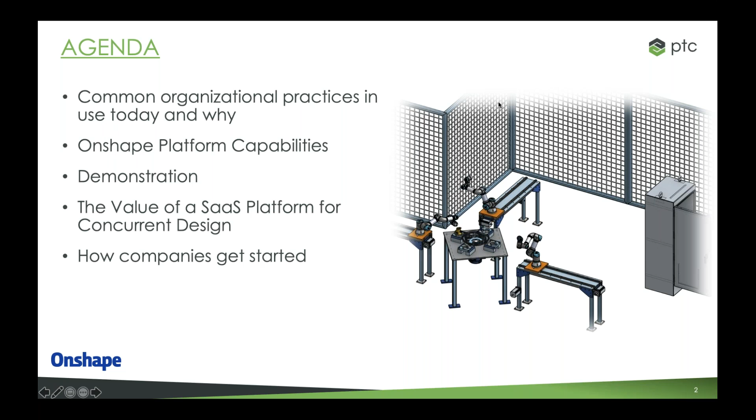So let's review the agenda really quickly here. We'll talk about common organizational practices in use today: your Windows folder system, your Dropbox, whatever you're using, a PDM. Then we'll talk about how you would do things a little bit differently in Onshape using the software as a service platform capabilities through a demonstration. And then come back to some of the tenets of Onshape again.

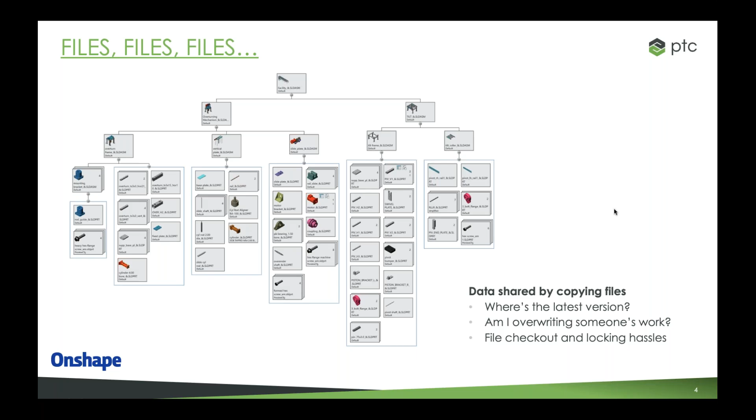Let's think a little bit more about taking those blueprints, those D-size pieces of paper with various parts being drawn on them, and equate them with files, right? Here's a pretty traditional file structure that you might find in a CAD system, with a top level assembly of a machine, some subassembly files, some part files that make this up. Of course, there's drawing files as well that then report up. So this is very similar to each part in each assembly having their own blueprint, right? Think about it - it's true. It's essentially, we just duplicated the drafting room in the modern file-based world.

We think of working in this modern approach. We have awesome 3D CAD systems. We have awesome computers instead of drafting machines on our drafting tables. And instead of file cabinets, we have file servers. And if we're lucky, we might have a database that's kind of taking care of things, like the document control person, knowing that Ed the engineer took out this file at this point in time, made these changes, and put it back in the database - if you have a PDM or PLM system doing that. But of course, when you're working in this approach, no two people can be working on the same file at once. Now, in fact, back in the drafting board days, you could actually have multiple people working on the same piece of paper at once, right?

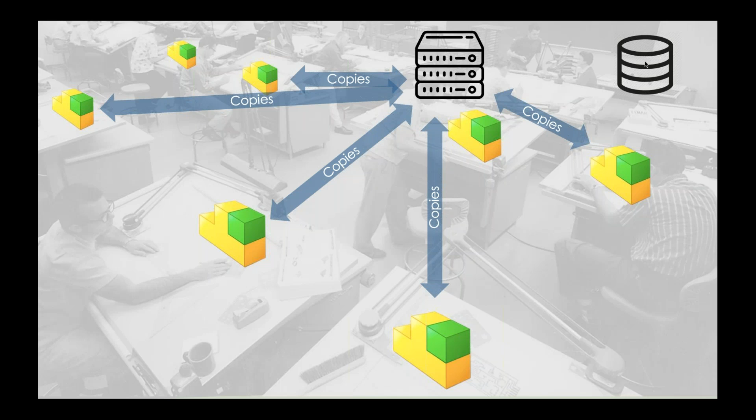If you really think about it, if you had enough room on your drafting board for two people to start drawing on different parts of it, that was quite rare unless it was a big, long wire cable harness drawing or something like that. I've seen that done in the past, but we really haven't progressed, have we? It's kind of weird to think about, but it's true.

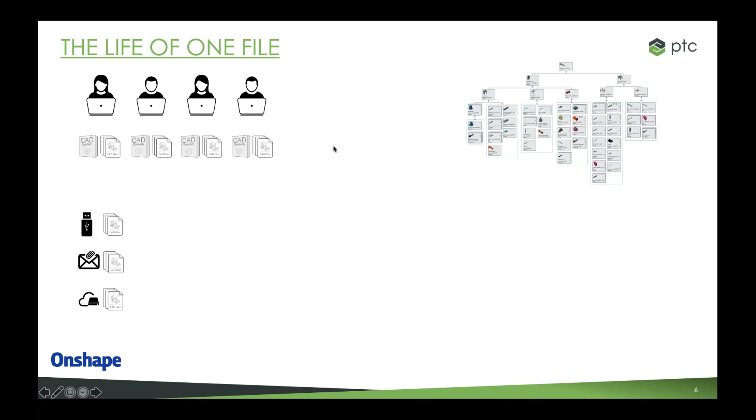So just think about that life of one file for a minute, and then we'll get into how you would organize yourself in Onshape, because in Onshape we wouldn't really think this way, we don't have to anymore. If you think about the life of one file between a team of 4 engineers that would interact with that one file from this tree of files, everybody has a copy of their own CAD system, a copy of a CAD file, and they transfer it in different ways via various file copying mechanisms, whether it be email, cloud drives, thumb drives, hopefully not, and file servers most commonly.

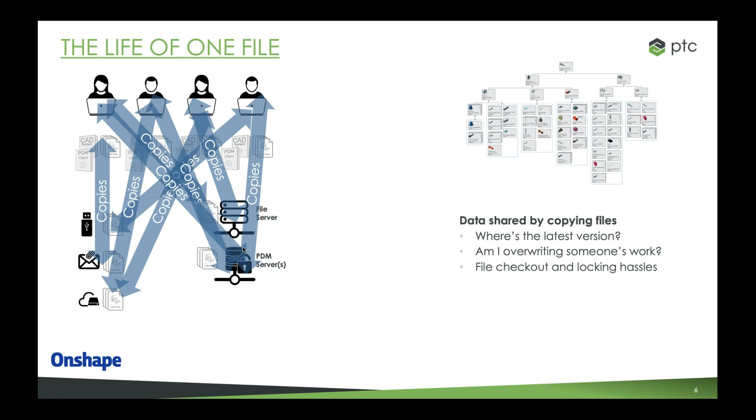60% of all the people that I talk to here at Onshape don't have any PDM system at all. They're just using normal file servers on their network. If they're a younger company, they might be using a Google Drive that synchronizes the files. If they're a multi-location company with maybe more than 5 or 10 engineers, they've probably invested heavily in a PDM server that manages the copy process and keeps track of where those file copies are going. But of course, that PDM system is very much like that photo we just had on the screen before.

And these tools are not anything new, right? Even the things being put out there as quote unquote cloud-based systems, they're still kind of file centric. Only one person at a time can work. There's actually installed software here, there, and everywhere. So these tools actually constrain what you can do for concurrent engineering, working together, which may or may not be a problem to you right now.

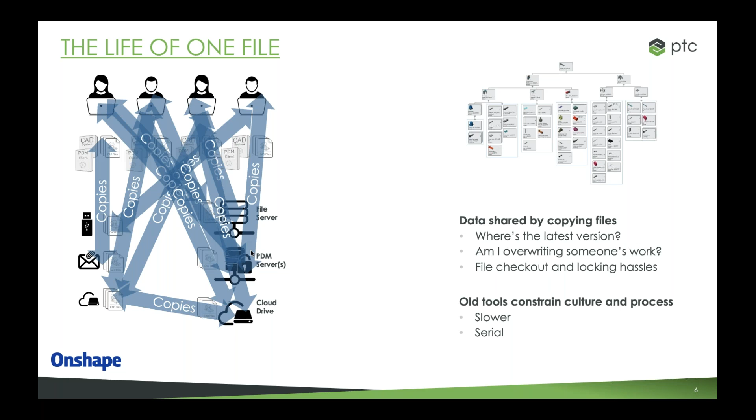But people that are taking advantage of concurrent collaboration systems like Onshape are actually able to get ahead of issues sooner. If we have this file copy based approach and you send a design change, or you're working on a design change after you've sent out files to somebody else to start cutting metal and stuff, everybody has seen this kind of email. This is not something that would happen in a live simultaneous PLM CAD system. But of course, it would happen every single day in a PDM system or a local Windows file server, etc.

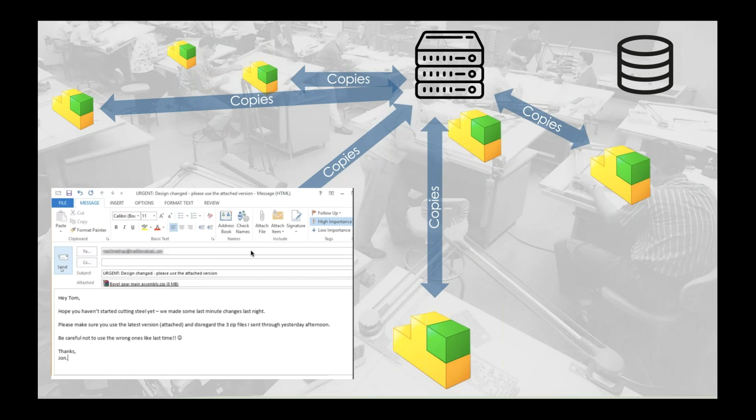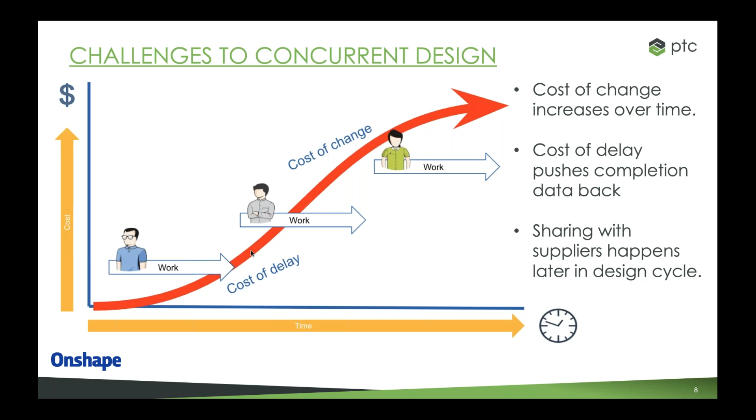As we discussed in the previous chapter of this series, a few weeks ago now, we talked about concurrent design processes. The older systems that are based on files, which only allow one person at a time to work, will end up costing you higher amounts of money and time the longer it takes to find a design problem. So if you can find that problem earlier by interacting and working together, you're going to be able to reduce that cost of change and cost of delay, which is a metric, a KPI, that many first-class companies are measuring nowadays.

People have been trying to build a real-time PLM CAD system, but I think they've been missing the mark if they think they can actually put the files in a database in the cloud and keep the CAD system local. Even the most modern systems that we compete with every day are just moving the file-based problem to a cloud container. It's not really a real-time collaborative environment like Onshape is.

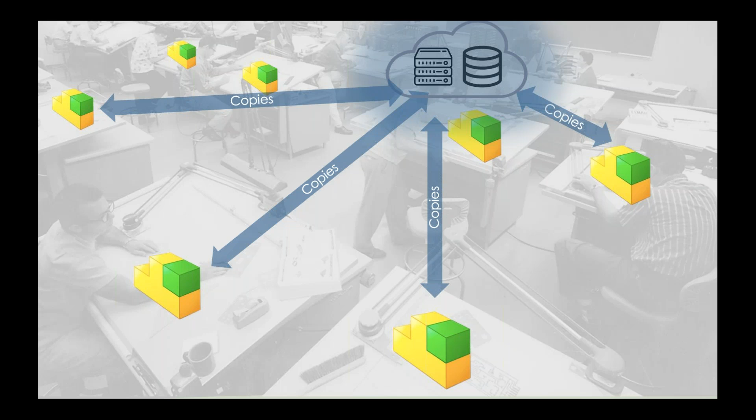So people that want live real-time analytics and information aren't going to get it from that previous slide we just looked at. If we really think about it, how can Mike, the manager up in the front of that drafting room, know what Ed, the engineer, is doing? Because quite often they're not in the same room anymore. There might be a customer site, or they might be at an office across the country. Of course, they can get on a Skype call and talk to each other, but it's not up to the minute information like most other business systems provide today, like Salesforce.com or Jira for software management and development. Things like that are real time.

You get dashboards, analytics, information about what's going on in the business of your company. All the other departments in your company have these tools, except for the most important department, the engineering department, that is the lifeblood and engine driving the company. It's kind of crazy that these tools haven't been invented yet. Until now, of course, we have Onshape, so you can get that real time information and work together collaboratively in real time.

So Onshape does more than just CAD, right? It is data management. It provides a new paradigm for design, practice, and workflow, which is really what I'm going to get into today. I'm not going to talk about how to draw lines and arcs, but I will be talking about how to organize parts and assemblies in a way that is conducive to collaboration and real-time problem solving.

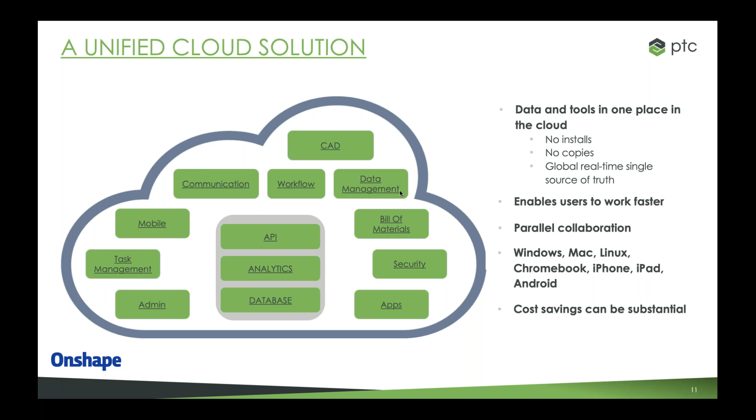So let's hop into it a little bit. We'll build some piece of machinery, at least a piece of it. This is kind of the end result of this particular design, a machine design with some robots moving along these rails here that are going to pick up these little parts.

Part interchange is important in this demonstration. We need small, medium, and large widths of these little carousel carriers that we'll be working with for different parts that are picked and placed. And we need to design it for different markets. Maybe you'll have different types of motors in the EU versus North America, so the power cabinet's going to change. There will be different parts in it, different types of wire, connections, things like that.

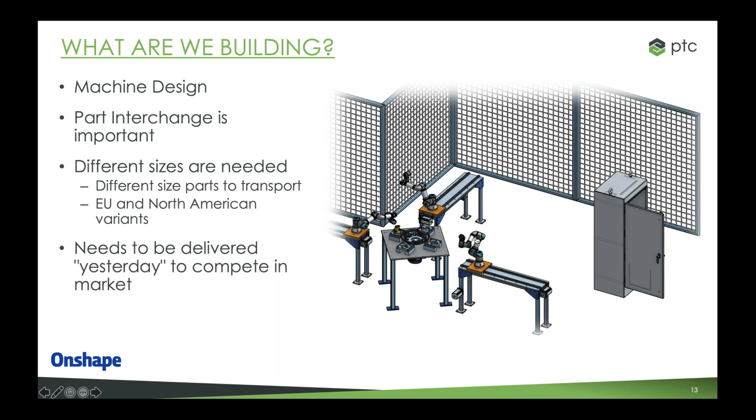And of course, when you're designing this type of machinery, it's always a very fast lead time, because you have the product manufacturer who's going to need a machine to automate the assembly process. So these types of projects need to be done very quickly. We'll work between several different engineers during this demonstration: Mike the manager, Debbie the designer, Ed the engineer, and Emily the electrical engineer.

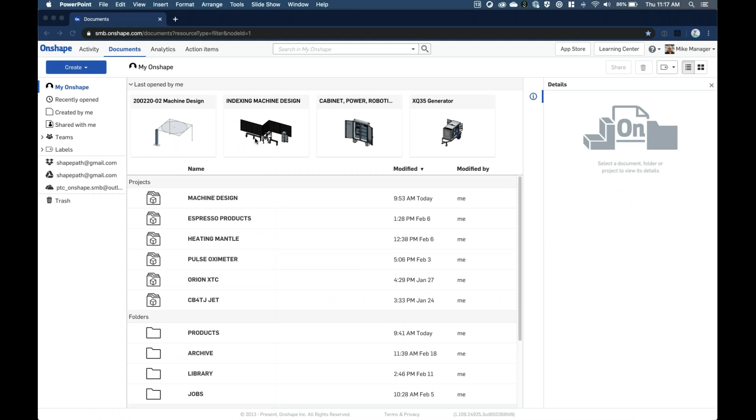So let's hop out of the slideshow for a minute and go into CAD PLM land here inside of Onshape. I can jump into the actual machine design itself. Of course, we're in a web browser, just Chrome here on my MacBook, and you can see I'm opening up multiple tabs.

I have the main documents panel tab. I have an activity tab to show what's going on, kind of a lens of information into what's happening at my company. I can see right here Mike the manager just opened up the indexing machine design document, and I can see a list of his activities in real time, so I can understand what's actually going on. Pretty cool to see.

Then we have the documents page, and then the top level machine design, which I just pulled up right here. As I move this around, we can see the actual machine working.

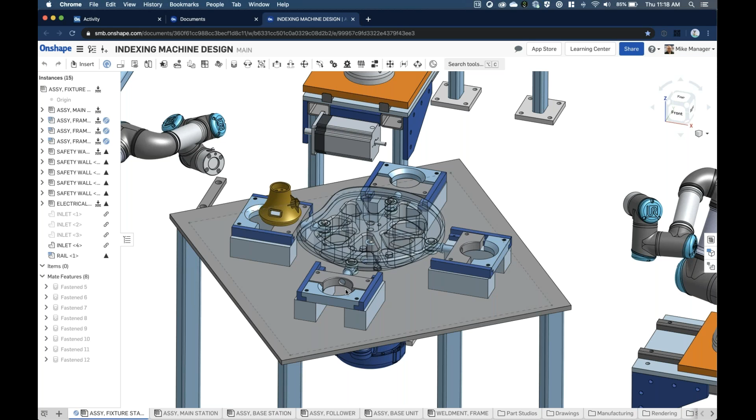I have this cam mechanism that's moving these plates back and forth, like here. And once a part moves over, this robot might come over, pick it up, grab it, and put it in a bin somewhere else right here.

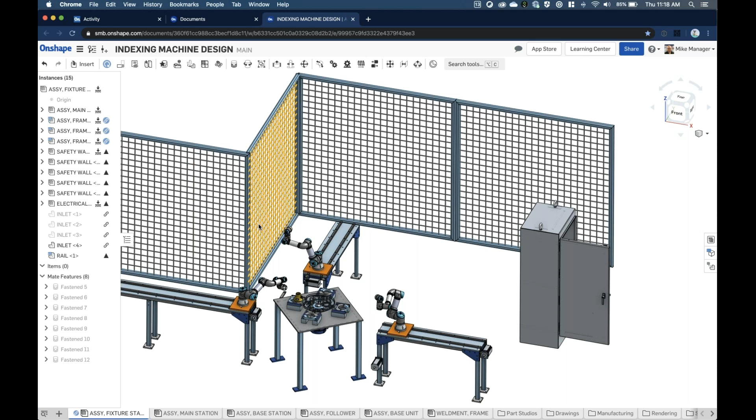So how would I go in and design in Onshape, knowing that we don't have to worry about file management per se? What I'll do is start a document for this machine design. I have a little bit of it started for ease of demonstrating what we're going to do. This is an Onshape document called this 200220-02 machine design.

If I look at it, there are several tabs in it: a top level assembly, a frame assembly, and several part studios for different types of operations. You might do this in several different documents that all report up to one another, of course, but for these three basic pieces, these are the unique pieces for this particular machine that I'm going to keep together in one document.

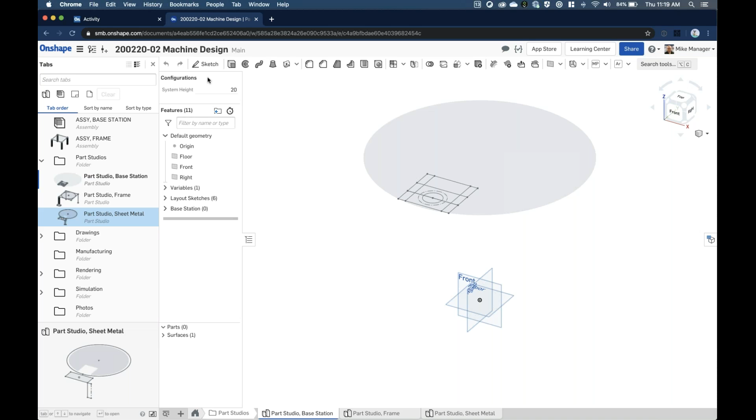Of course, you would not do this kind of thing in a file-based system, and the reason is because only one person at a time can work in one file. So on this base station part studio I'm working in, if you wanted two people working on this, one person might be working on this piece of rail right here, and another person might be working on this end fixed piece right here. But in Onshape, we don't have to do that.

Because the file is not the atomic unit in Onshape, it's the database that's keeping track of things for us. I'm creating two parts right here, and you see this part list being generated. It keeps track of all the different parts being made inside of the system.

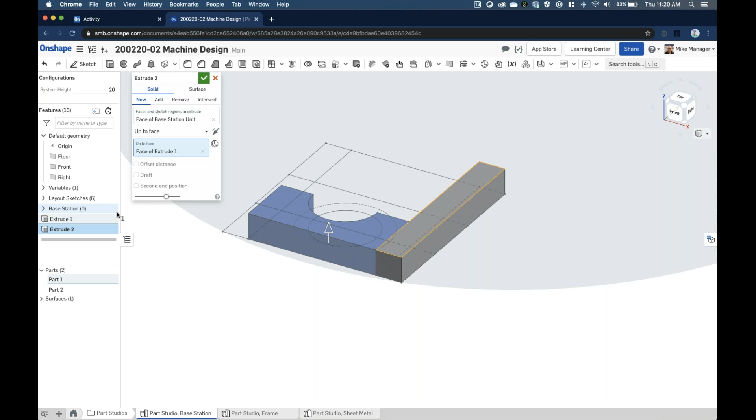So that's two different parts. As me, Mike, the manager, who has signed in right now, I might start this design and then interact with some of my other colleagues to help work on this.

If I add a comment to this surface, inviting my colleague Debbie to help me with this, how to attach this to the frame, I'm going to ask her a question on how to do that. I can ask her that question, I can assign her a task. That'll be a future discussion we have in the system to manage all the tasks and processes in my company. But I'll assign that to her now.

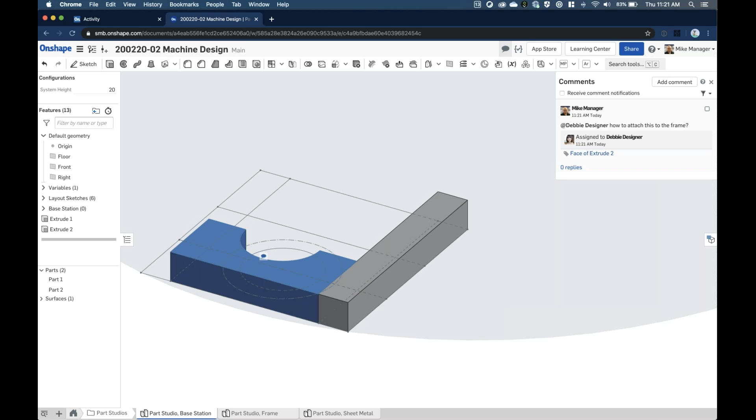She's invited to work in this design in a view-only fashion by default, unless she already has some other kind of access built in already. Let me go in and open another window as a second user right here. I'll sign in as Debbie, the designer. So I'm changing hats, if you will.

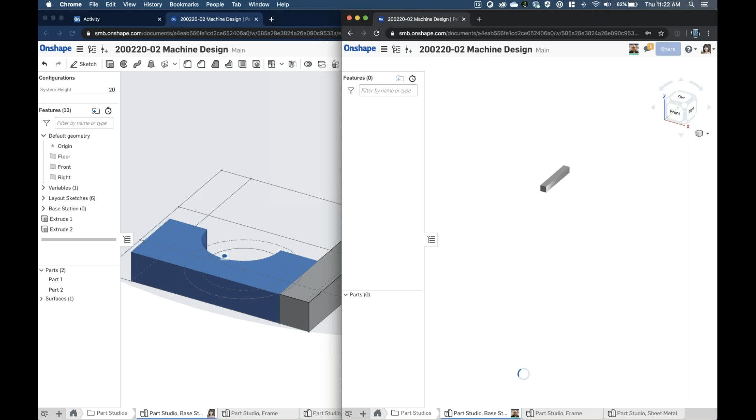As you can see, she has been shared into this particular design. If I look at the share settings, it's actually in a project. Let me just share her in like this, give her view and comment access. If she goes to her document list, she will have access to the machine design project and be able to jump into that design with me. Now we're both looking at the same information simultaneously, and we can work together in one document instead of having to split these out as multiple files.

Now let's think about this again for a second. Why is this even important? Why is it cool to have multiple people in one document designing these parts together?

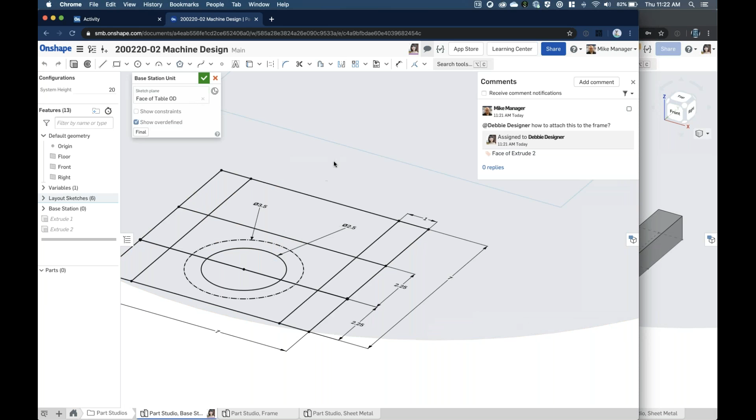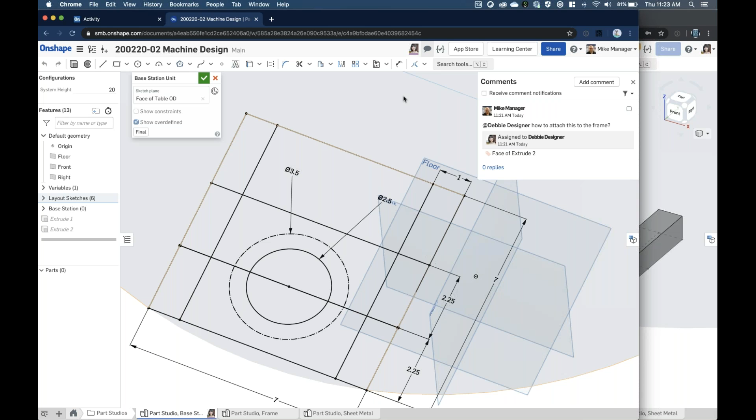Well, look at this, we have a layout sketch. This layout sketch is very nice because it's like an engineering notebook or even a napkin sketch that describes parametrically how this system should come together. I did not have to do any kind of fancy assembly-in-context modeling, didn't have to do any weird skeleton type modeling. In fact, all I did was sketch out what I wanted for the shape of this design, and that makes it easy to go in and start establishing different parts inside of here.

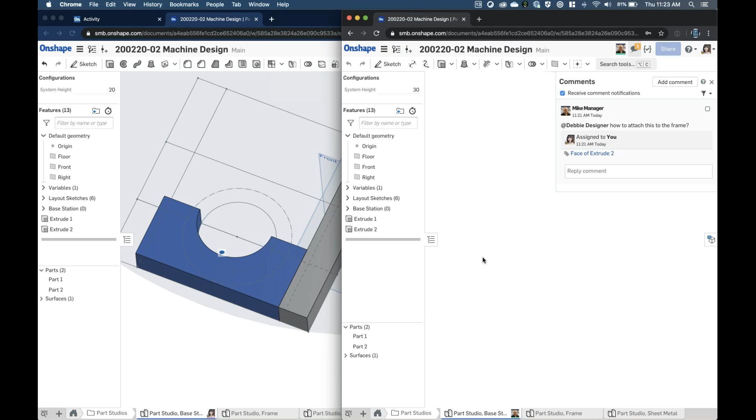And because of Onshape's database-driven nature, not being file-based and locking up files, I can then go in and propose edits, modifications, and reply to comments that have come in. Debbie might say that a socket head cap screw may be appropriate, right? So that conversation is happening live inside the document.

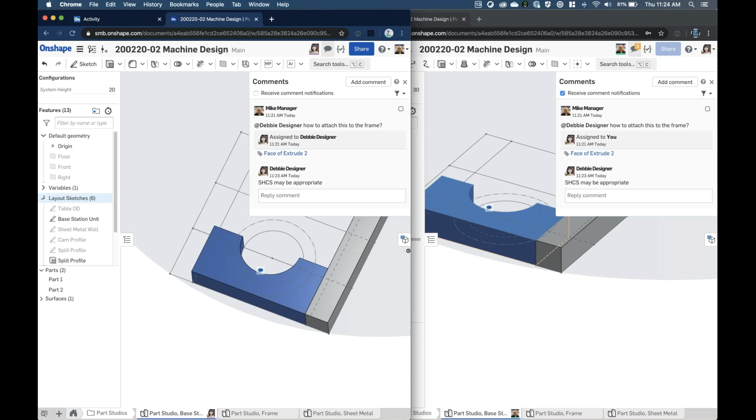But more importantly, as Mike starts making changes to the design, we'll split our windows up here so we can see what's going on a little easier. I'll turn off these planes and turn off this layout sketch so we can see even more clearly. You can see, of course, that's updating on Debbie's side of the screen.

I can go in, create a sketch, and offset some of these geometries that we're looking at right here.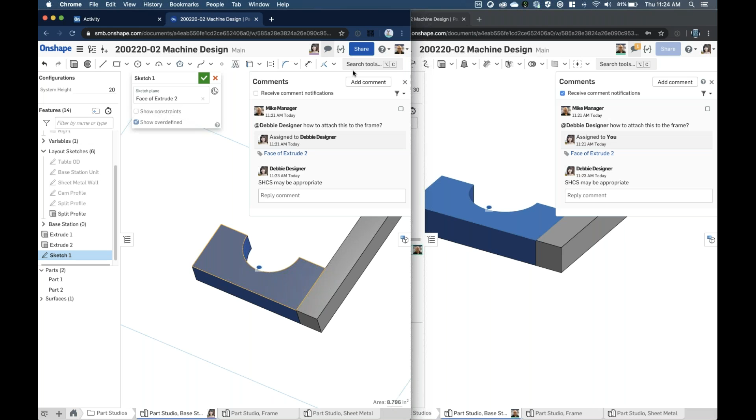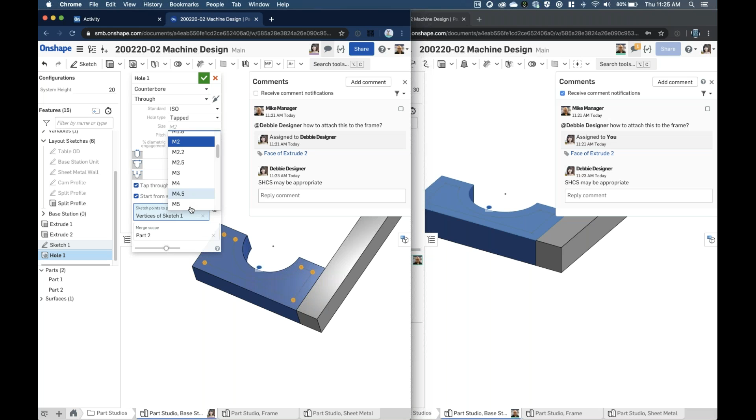Let's go in and add that feature to attach a socketed cap screw. Of course we need a hole to place that, so I'll throw in an offset on this particular surface, in locations where it might make sense to have a socketed head cap screw in place somewhere. Maybe we'll do 3/8 of an inch. And I'll place that hole inside of the design using the points on the corners of that sketch. We'll call it out as an M5 socketed cap screw hole for counterbore.

And now we have that, and of course Debbie is seeing that update straight away in her design. And of course she has access to this design, she's a member of the project inside of here.

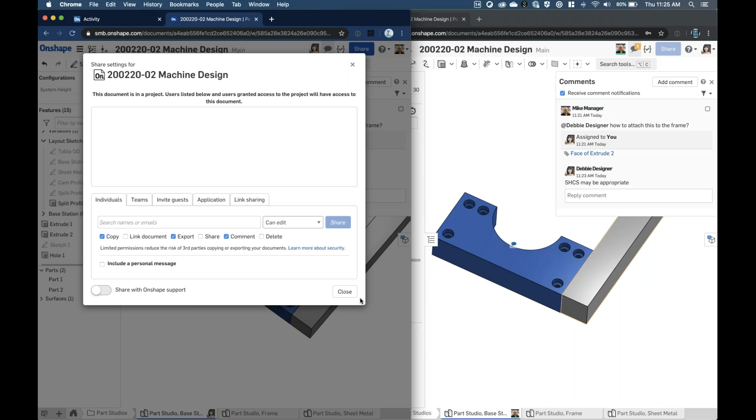Now, she's actually a member of the engineering team, so she doesn't have to have any special access. I could actually remove access like this because she's a member of a project. She already has the edit permission being an engineer in my company in this particular project folder. So I could even remove that, and she still has the ability to edit this design right here.

She might know that this hole right here doesn't need to have holes on this corner and this corner. Mike can even see that Debbie is making that design change live and in real time. As soon as Mike or Debbie hits the OK button, we're seeing that update live again.

So the other part of organization in an Onshape cloud-based approach, and I'll just accept that right here, is that the names of the parts can just be set on demand.

You don't have to go file, save as, C:\ this or that. You're just going to say this is the rail just by naming it as such, and this is the fixed plate. That's the two parts I have here at my fingertips. And if anybody else in the company wants to find a part called rail in the system, they can search the database to find it. It's going to find it because it's a real life database driven object.

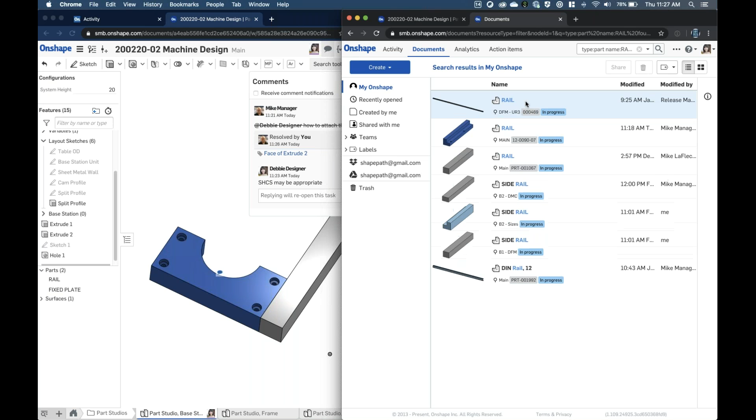You can see right here at 11 a.m. is when I originally made one of these rails. There's more rails popping up here as we go through, and this rail will pop up in just another minute. So it's really pretty cool that you don't have to know where that part is. It lives in this document, but I could use that rail somewhere else if I really wanted to, which is great.

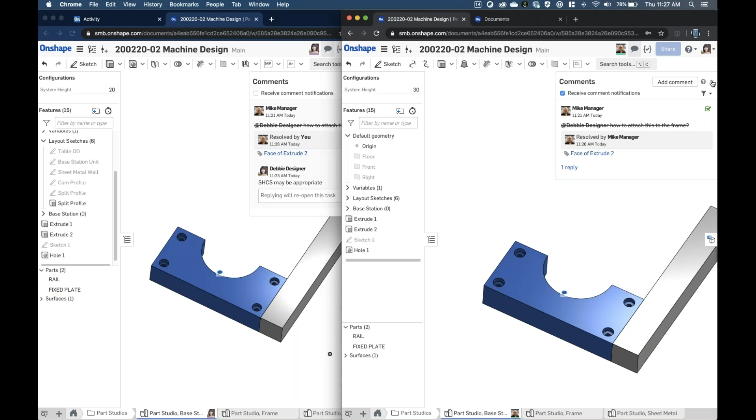Now, I renamed these parts with other people looking at this at the same time. Everybody knows this would be a complete disaster in a file-based system. Renaming parts while other people might have other copies opened up causes all sorts of problems, which would never happen in our system. So we're able to create these parts together inside of the design without thinking of file management. That's the big thing I want you to take away from this so far.

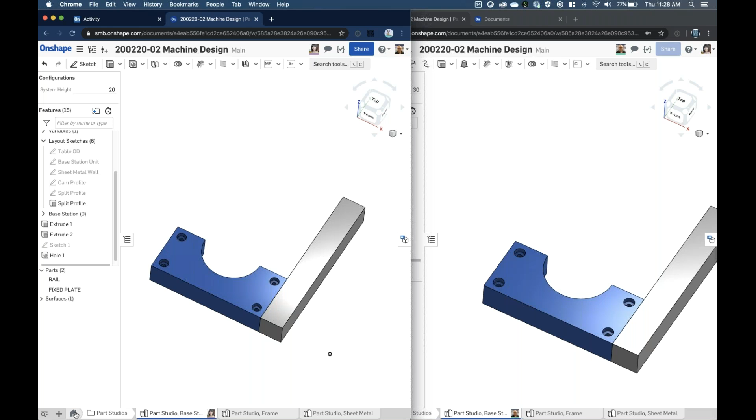Other ways of organizing your information are to bring these into assemblies and start referencing things from your libraries of information that you build up over time. So if we go to an assembly I happen to have, right here for the base station, a blank assembly, and I insert the two parts I've created so far into this assembly, I have those two items.

I have another item on the other side, and I need two rails essentially to keep this together. So I'll just make a copy and paste of that particular rail. This part is fixed in space, of course, the fixed plate. I might group this and this together because that's how I modeled them. That's one way of mating parts inside of Onshape.

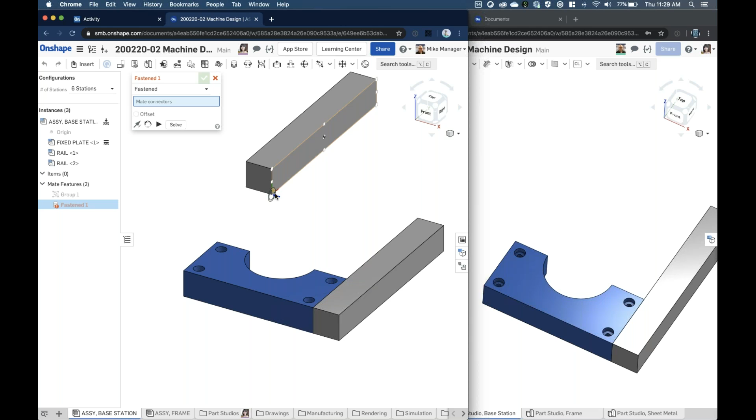Another way of mating parts inside of Onshape is to fasten the components together at appropriate datum points. So I'm going to take this corner and match it to this corner right here. There we are. And of course, maybe I need another plate on the back that's not fixed.

I will continue to do that as Debbie, going back to that layout sketch, taking this piece out, hitting the extrude command again, going up to this face, and then naming it appropriately, of course, the moving plate. And I would insert the moving plate right there. It pops into place automatically, but of course it's not really mated in place.

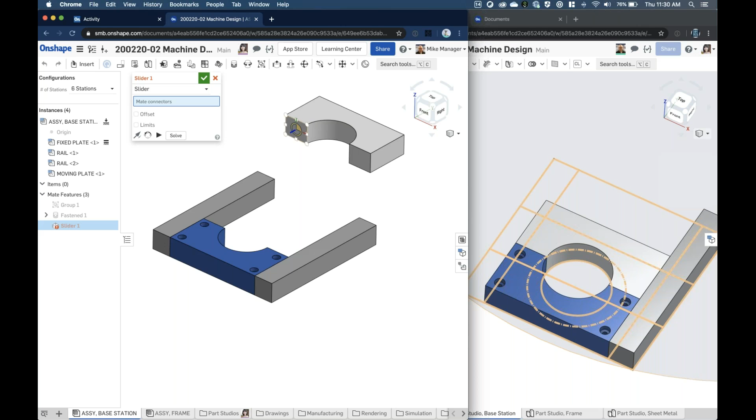I would need to add some sort of mate to it, so I'll just add something called a slider mate, taking this surface here and putting it on that surface in the center as well, matching it up. And now we have the ability for this to slide back and forth, and it adds one mate. So you can see organizing your assembly is also much quicker and more effective and less work.

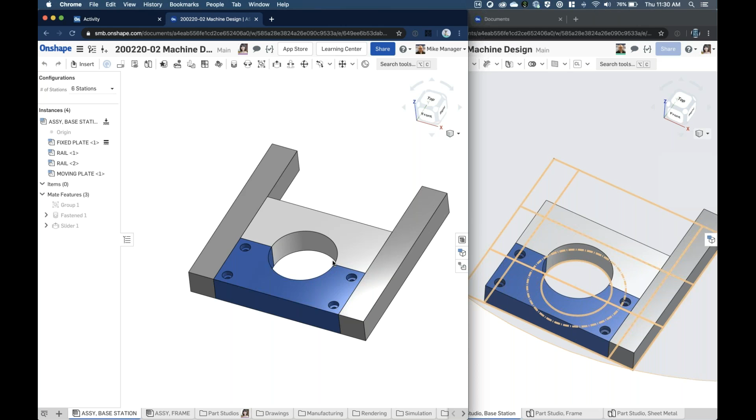I can even set the limits of this slider mate to go between a certain range of motion here. So I can just set that so it only moves between 0 and 6. Looks like 6 is a little bit short for that range of motion, so maybe we need to make the rail bigger. So Debbie is going to make the rail bigger.

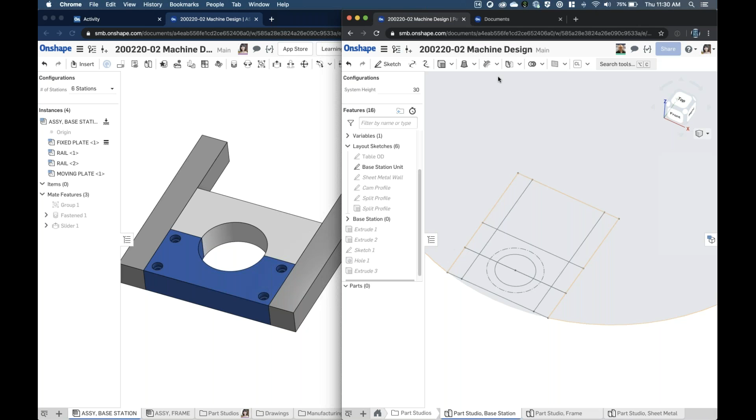Maybe a comment is thrown in by Mike asking her to make the rail bigger. So she can go into this design to make this go from 7 to 9. As soon as she hits the OK button, we're going to see that update in the assembly, of course. And now we have a part that's not going to fall out of this channel that I've developed right here. So that's another way of seeing how quickly you can interact with one another.

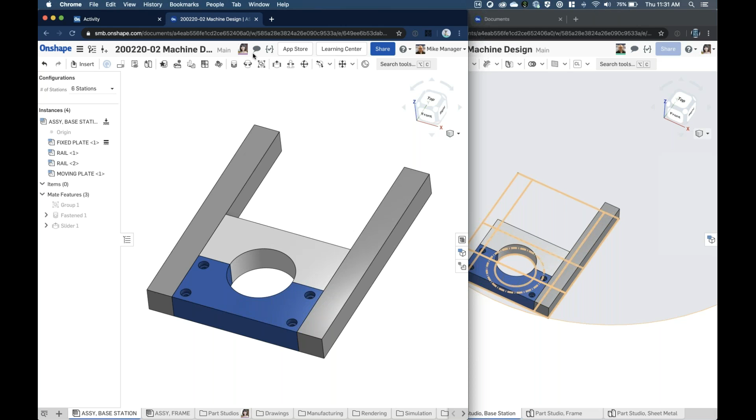You didn't see any file save as, check-in kind of operation. Everything in Onshape is recorded as an item in the history. Think of this as like a bank statement where you see all the transactions on your card. In Onshape, you actually have a listing of every single transaction that's ever occurred in the design.

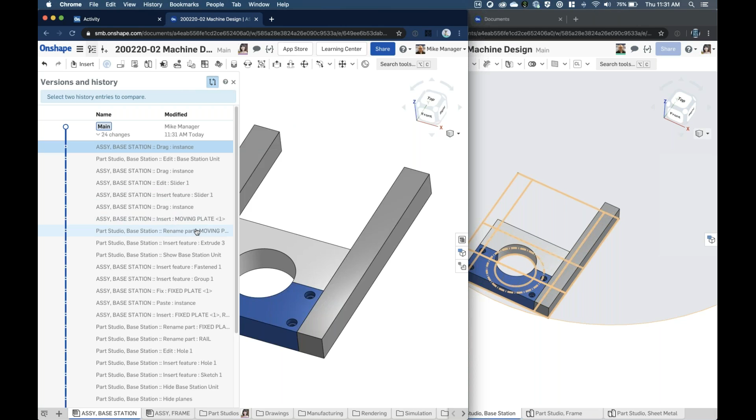We're not creating file copies on a server somewhere. It's the database that knows how to reconstitute the model at any point in time. I can even compare one moment against another to see what the differences are between an older moment in time and a newer moment in time.

If I go to the part studio right here, we'll see the change occur, showing the new length added to that particular piece of rail right there. And of course, in this timeline view, we could label versions in time as well.

So I'm going to check the questions panel right here. Quick question about using a motion controller like a 3D mouse or something. Yes, you can do that. 3D Connexion motion controllers have Onshape drivers available. You just need to update your driver to the latest version and it should work.

Next thing I'll do is just create a labeled version in time. Right here, I'll set this at version 1, so that way I can keep track of major developments along the timeline. So that's version 1 in our timeline.

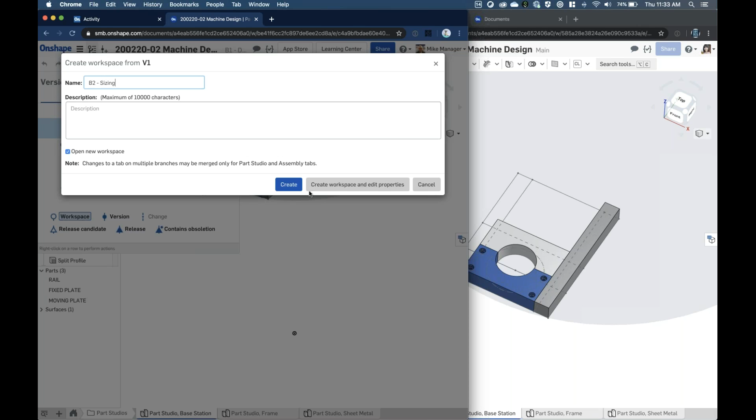We can even try out different design alternatives now with this unique timeline-driven approach. Instead of doing a save-as copy, making more and more files, Onshape allows you to branch to create different design permutations and ideas. So this one might be design for manufacturability, and another might be a branch for the sizing of this. Remember, we wanted different sizes for different reasons, for different parts that might interface in this design we're looking at.

So let's do that. On the sizing branch, I'm going to go in and create a couple of sizes using our configuration manager on the side of the screen. I'll add an input for maybe device X, device Y. Let me just do it this way, copy and paste. Copy that. Paste that. There we are. Device Y and device Z.

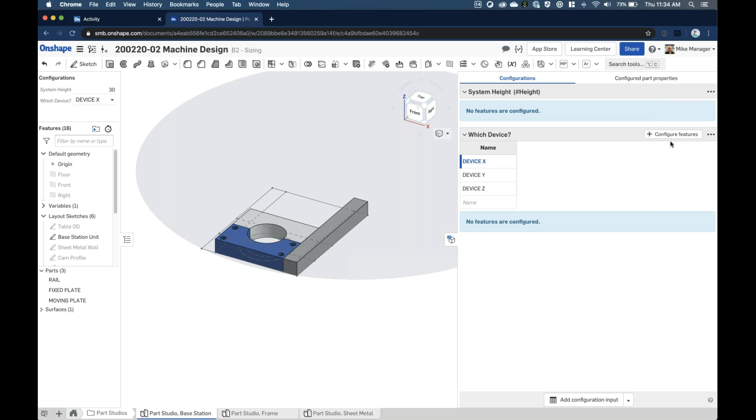So now we have these three devices, which I might ask a question, which device... First day typing, I guess. Here we are. And so now I have this interface, this menu showing me device X, Y, and Z. And then I can configure from one nice sketch the dimensional information I need to alter. Maybe this diameter I need to alter as well. So now I've built up a nice small table.

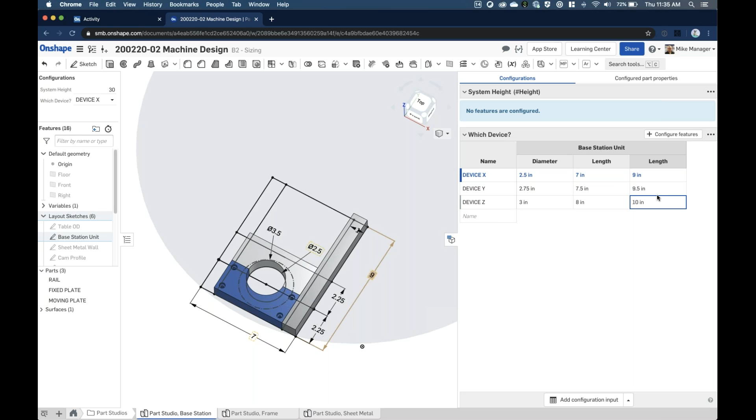We'll go from 2.5 to 2 3/4 to 3. We'll go from 7, 7.5 to 8. And then this length right here might be 9, 9.5, and 10. Now I've built up a nice little table that allows me to alter the shape to accommodate different devices that might go into here.

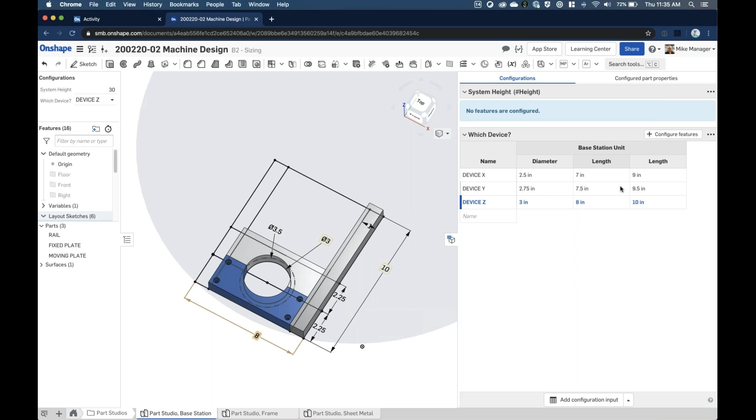So we did that as configured items. Now, organizing your company, I'm looking for these. I have these three parts that I've controlled using these three configurations. Of course, that's available in the assembly as well. But how would I organize myself? That's the focus of this discussion. I have these three plates that need to all be found, released, and produced.

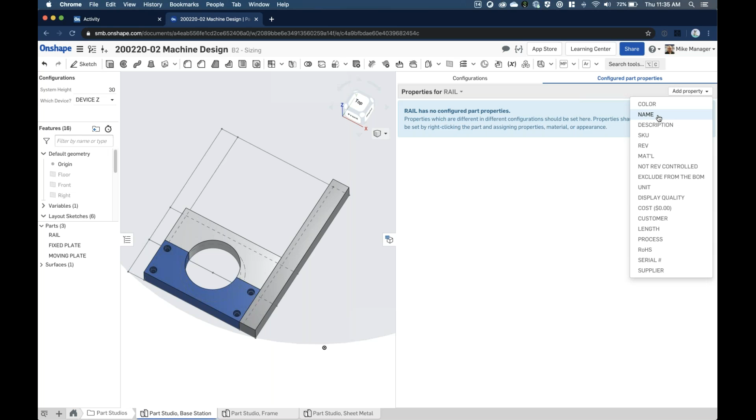So we have configured part properties, and this is where the CAD system kind of becomes a business system. So I have this rail, and I can add a property called name. Maybe I'll put the part number to SKU. I'll also show, let's see if there's anything else I want to show. Maybe not, I guess that's all I'll need.

So for device X, Y, and Z, I'll just go device X, Y. I have this other system height variable, just ignore that, it was something I was playing with. Rail device X, right, I'm giving it a name. So this is actually the name of the part in the database. Device Y and device Z. And of course, look what happens immediately in the parts list.

We're using the rail for device Z. If I go to the assembly over here, it's probably going to be X because that's the one I inserted the first time, and there it is. Of course, we can configure the assembly as well. Here's the bill of materials in the assembly showing the rail for device X right there as well. So everything is all up to date simultaneously. No need to save as, check in, check out, or anything like that.

Of course, you'd have to fix a whole bunch of broken references doing what I'm doing now in other CAD systems. Let me go back to the Part Studio. So, configuring the properties of the parts, I can even give these all different part numbers. I just assign them all from our part number database, which you can configure inside the company settings of the Onshape system. And of course, you would just do this for each one of the parts.

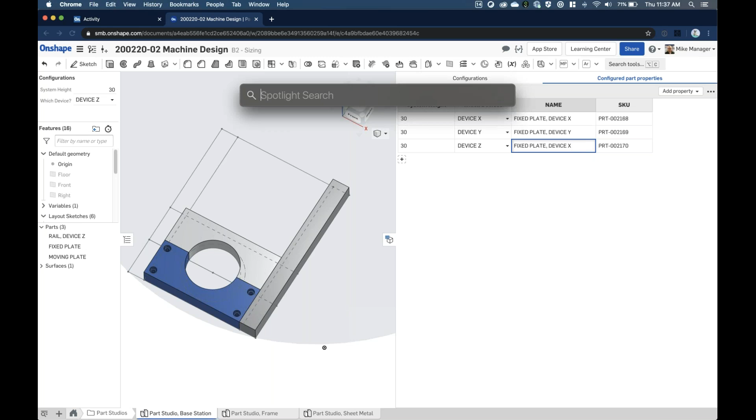All right, I won't keep going with that. It's pretty clear now that you have all these parts, and you can release them. If I go to the assembly, I can match these things up.

So you're organizing your assembly to use each of these different sizes: Device X, Y, and Z. You go to the configuration tool here, hide this one, and add a new input for device X, device Y, and device Z. There we are, and of course it'll have the same name as before, which device.

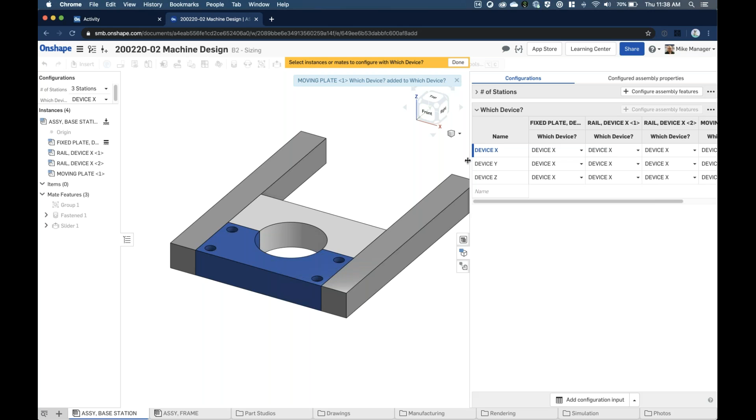To configure that, all I have to do is pick the part out of the list and tell it which one I want it to use. So I'm doing a mapping, just mapping one field to another from the Part Studio to the assembly. Now I have device X, Y, and Z, and I have assembly level configurations.

Just like that, I can work with device X, device Y, and device Z, and the parts are up to date right here. The mates all work too. You could even configure the mate. If I go into the slider mate, I can configure how long that should be able to move.

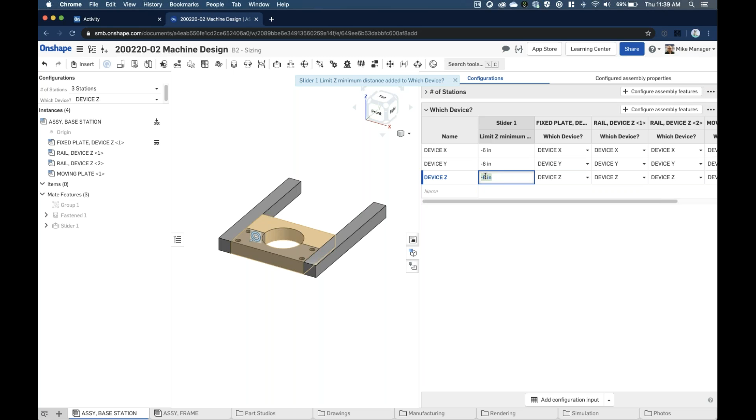So maybe in device Z it's going to be 6.5, and in device X it's going to be 5. So now device Z can move further back than device X, which should only let me move 5 inches. If I measure between here and here, it's 5 inches.

So you can see how fast this is. This is incredibly speedy design because you're not waiting for the baton to be passed from one person to another. Instead of running a relay race, you're running the race all together at the same time. It's just a way faster way of doing work.

Of course, the bill of materials is also configured and up to date with the available information. I can even generate the part number right from here, and even set the name of the configuration right here - this is moving plate for device X.

I actually did that from the BOM, but if I go to Y, you'll see it'll go back to just a regular name, and I'll call that device Y and device Z right from the BOM. So this is a live BOM that we can work with.

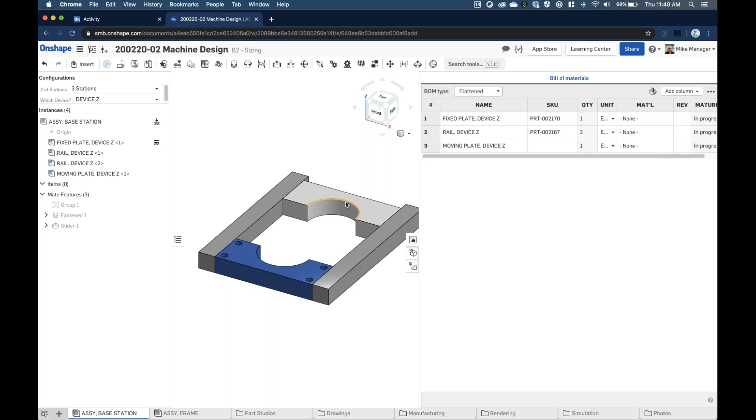Now, at some point in time, you want to stabilize this - this is early on in the development process. We don't want to have a completely free and open thing forever once we start going to quoting and manufacturing. That's when you go in and create a release package to stabilize it.

So I'll take this assembly of the base station, create some sort of drawing of it. I might actually have a drawing ready to go - all I have to do is just load it up and refresh it. There it is, it's already partially done.

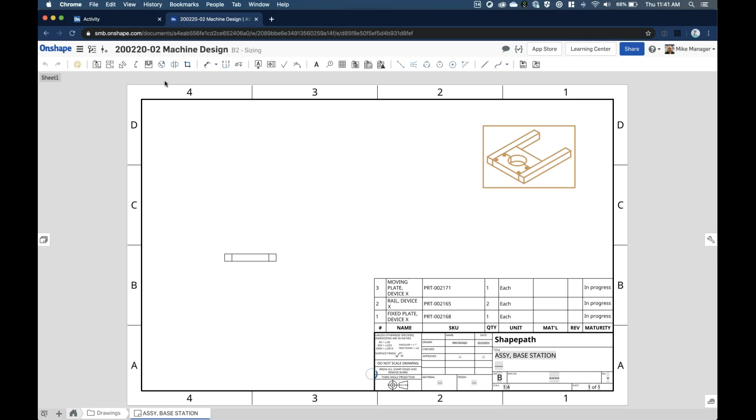There's my bill of materials, and I can show the shaded view, pull out a couple of sections, things like that. I like the way this looks - looking good. There's my BOM, and I want to release it, so I'll create a release package including all of the parts that make things up.

It's telling me I need a different part number - I must have used this from another design. Let me reset these.

All right, so it's showing me right here all the things - all the parts, all the sub-assemblies that make it up. I can assign those part numbers straight away and give it an ECO number, which I usually just match to the drawing number.

Oh, copy that again - undo is your friend. There we are.

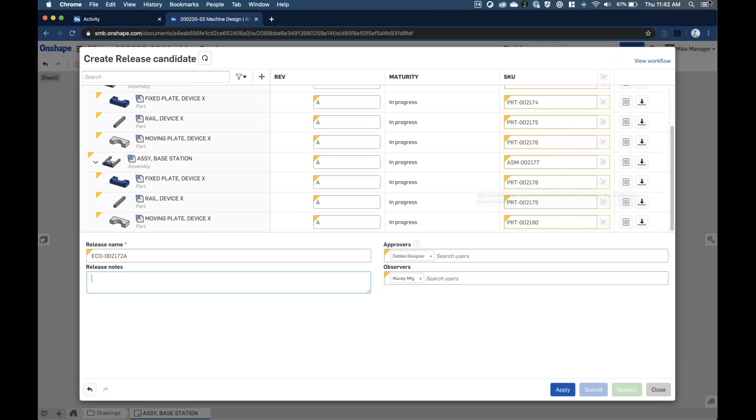And I can approve that - somebody can approve it for me, like Debbie, and somebody can look out in the manufacturing department that this is coming down the line, and I can submit that for approval. So that's the release management process to stabilize that, as a labeled version in time.

I've actually told it not to let me release it if we have a pending update on a drawing as well.

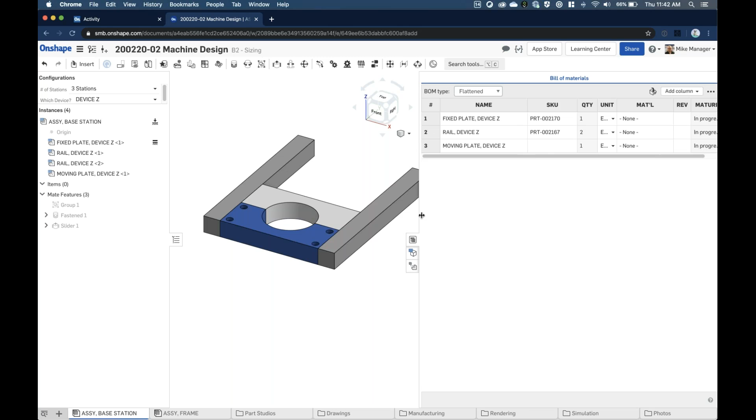That is different, right? Now, if I go back to the assembly, maybe you want to also insert other parts from your libraries—maybe a standard actuator, a standard library of different things. You can insert parts not just from inside the document, but from outside of it as well.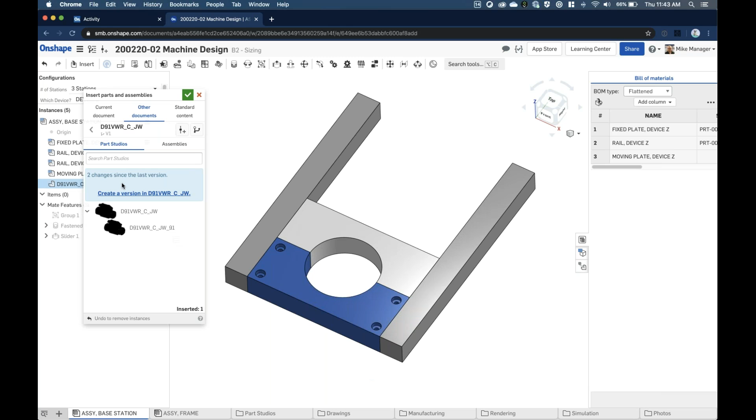If I go to Onshape here, you can browse through any libraries you've generated. Maybe I have an automation folder with motors or hydraulics where I can drop in something I've downloaded from a supplier. I can go in and drop that component into the design by browsing around my system for it. But we're in a cloud-based database, so we don't really need to browse around for parts—I could actually search for parts instead.

If I hit this filter button, I can say I'm looking for an assembly, or a part from a certain supplier. Let's look for SKF bearings. I'll search for anything made by SKF in my system, and it produces results. There's an SKF bearing right here, and it asks me which configuration I want, since there were configurations built into that part. I'm looking for the 626, and I can use that particular configuration inside this design—it's configuring it on the fly.

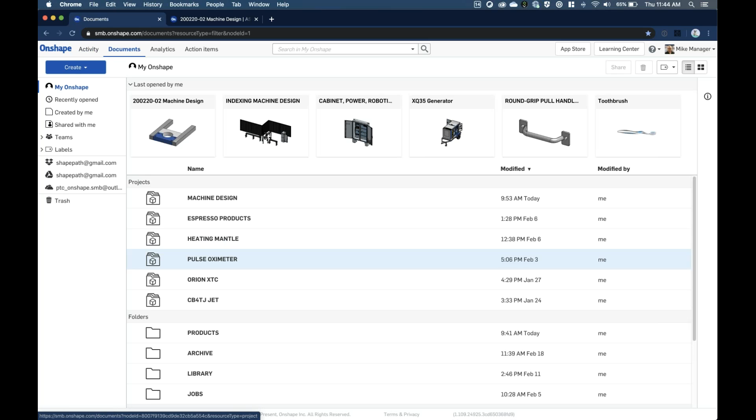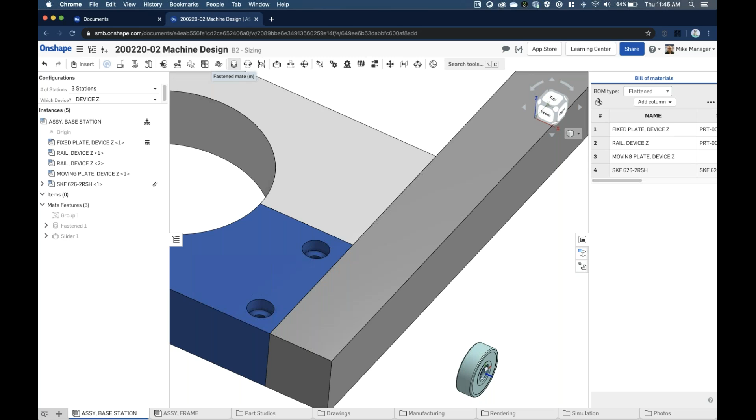This is just something I configured in my library. You can, of course, build up your own library any way you want. I'll browse into my library to show you what it looks like—I've broken it into different categories. Here's some hardware in my library, and I can use those parts inside this design. Let me drop this one in and snap it into place wherever I see fit. I'll fasten the center of that to the center of that, and now our bill of materials is up to date with that information.

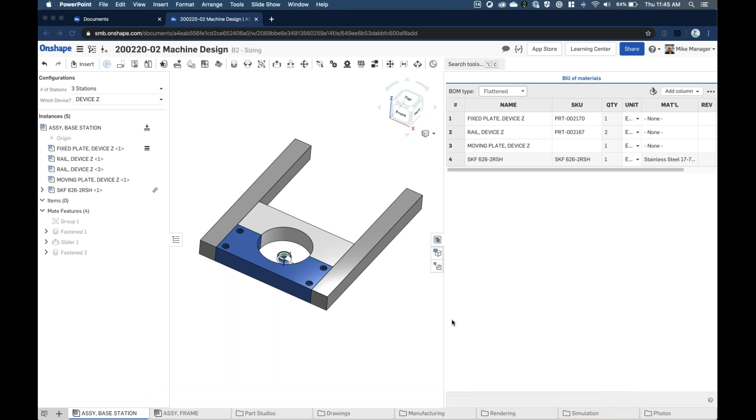So organizing yourself in a system like this becomes much easier—you don't have to think about all the different places where files are being saved. That's the moral of the story here. Let me go back over here.

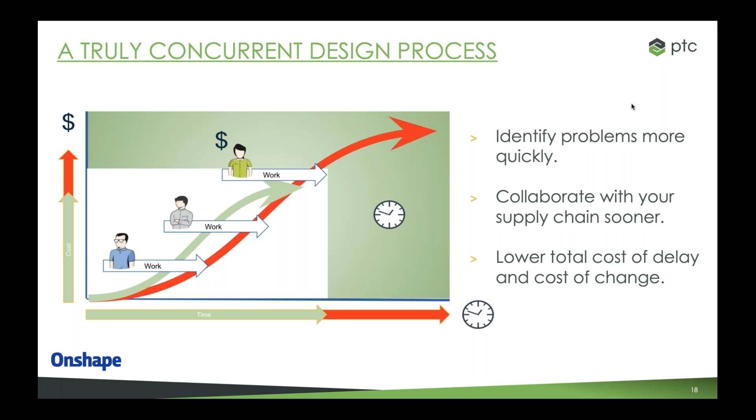This also allows for the truly concurrent design process we've been discussing, letting you work simultaneously with a design team. And remembering what we started with, it enables real-time problem solving. This part studio concept is really the most effective way to author designs that have one part living next to another. You wouldn't build a whole airplane this way, but you'd certainly build the steering wheel, which might be made of four or five parts that go together in one part studio.

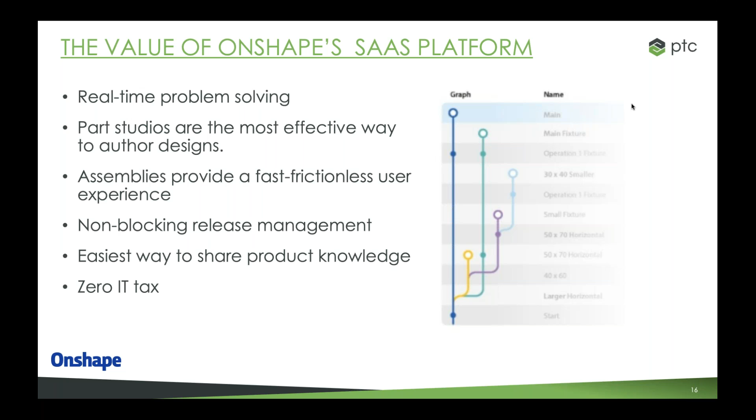You see the assemblies, how they work, both internal to the document or external—they provide a fast, frictionless user experience. You just snap the parts together and assign relationships, distances, motion, things like that. Release management allows you to work without locking people out of doing other things—we'll talk about this in detail in another presentation. And of course, it's very easy to share your product knowledge, both internally and externally, to other stakeholders within the company.